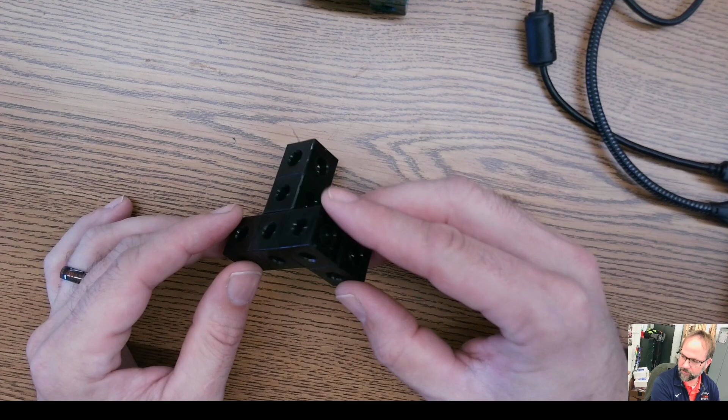Alright, the next part and my last part that I need to create here is this black piece. It looks very similar to one that we created before, but I'm going to use a different method to create this one, so hopefully you can learn a new technique that maybe you like a little bit more than the other. So we're going to start a new part studio.

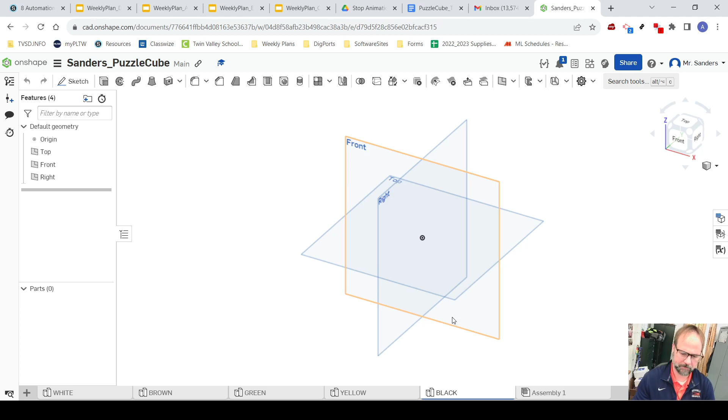We're going to rename it right away for whatever color it is, so for us it's black. I'm going to grab Sketch and click on my front view, click N for normal and P for plane, and grab my rectangle tool.

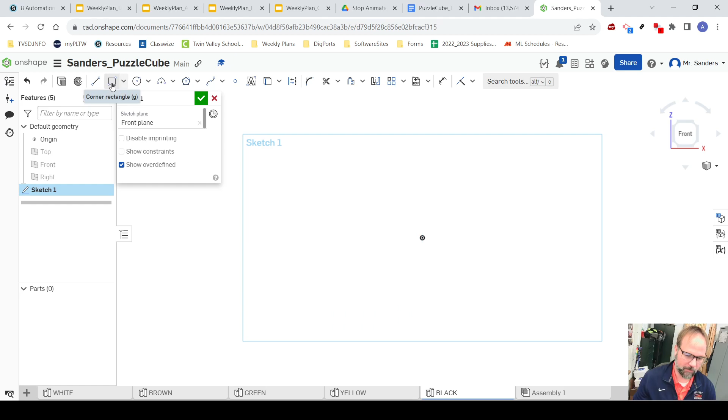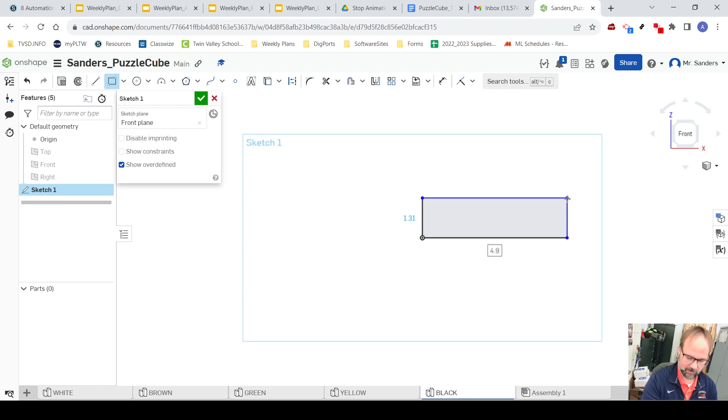What I'm going to draw first here is this rectangle going this direction, then I'm going to add in this piece here, so I'll have this T created in order to extrude it. I've got a rectangle that's 3 blocks long, so 3/4 plus 3/4 plus 3/4 gives us 2.25, and 0.75 the other direction. Then I want to get the part that's sticking up top here.

So I have my rectangle tool selected. I'm going to click on the line, making sure I don't click on this little square. I'll click on the line, move up here and click. I'm going to type in 0.75 for the base and 1.5 for my height.

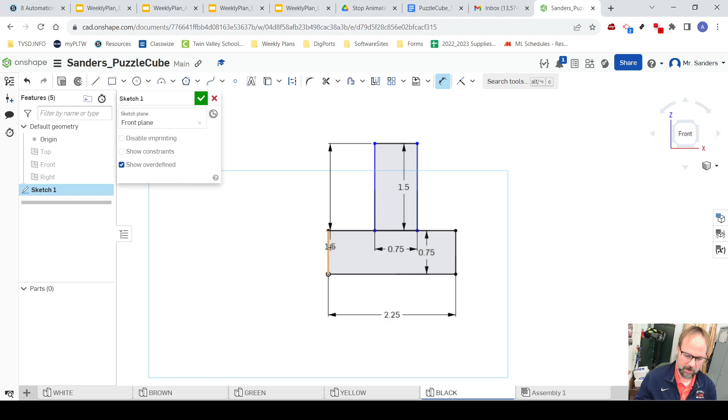Now this spacing here is not right yet. I have the right size, it's just not in the right spot, so I need to grab my dimension tool. I'll click on this line here, and then click on this line here, and make that 0.75 and hit enter. Now I have it spaced out perfectly.

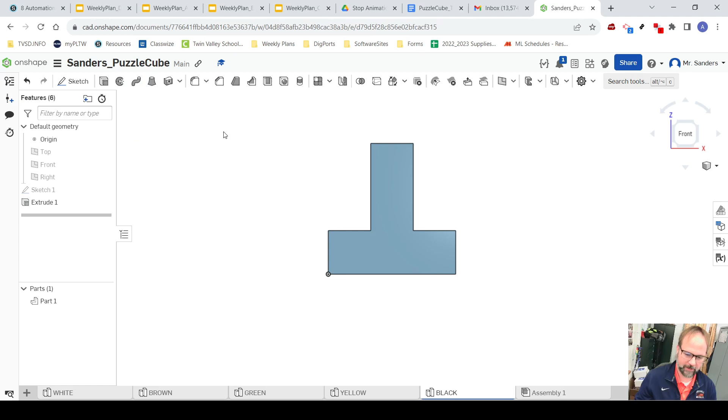I can confirm the sketch, hit extrude, click on this face and this face, change the number to 0.75 and hit enter, and then confirm my sketch. So instead of adding one block at a time, what I did was create the whole T in one step. The last part that I need to do here is add in this part that's sticking out the back side.

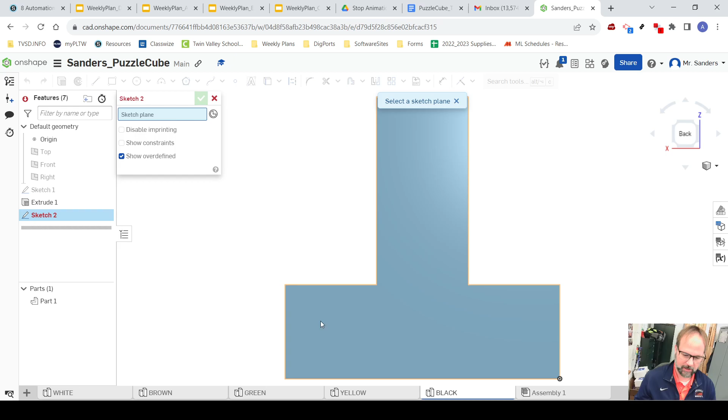So we're going to rotate it around to the back, grab a sketch, click on this face, and then grab my rectangle tool, click on the corner, hover over this corner so I can use that to drag down. Now I'm not clicking anything, I just hovered over it. I move it to go down, and then click on the bottom line, and that sets it up to be the exact size that I need it to be.

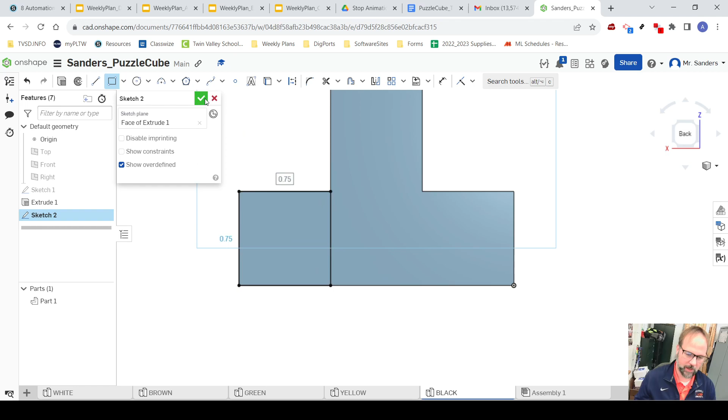So I can confirm the sketch, hit extrude, click on this face, change it to 0.75 and hit enter, confirm the extrusion, rotate my part around, and now I have this exact part.

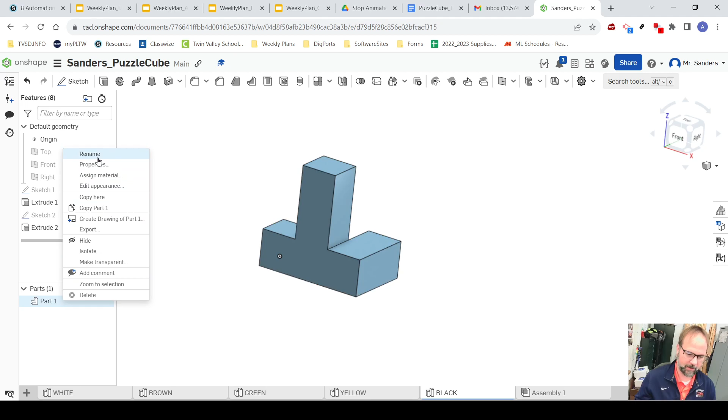We need to change the part name, so right click on part 1, rename it to black. I'm going to right click on black and edit appearance. If I choose black, it's really hard to see the details on this, so what I like to do is choose something that's like a grayish color so I can still see the edges and it makes it a little bit better.

So that's the last part that I have for my puzzle. The next thing I'll do is put it together in an assembly, so we'll put it together digitally in our assembly.